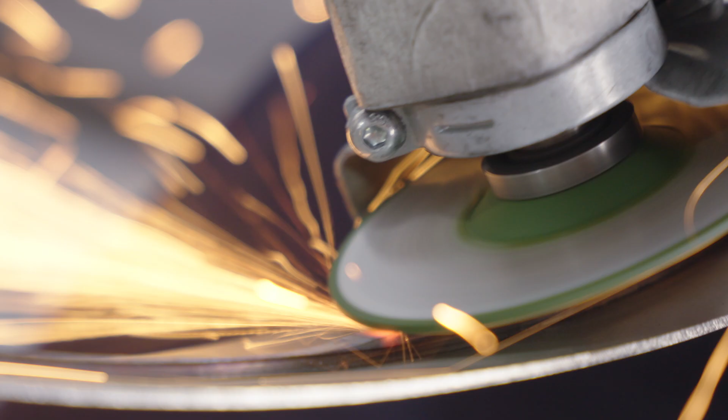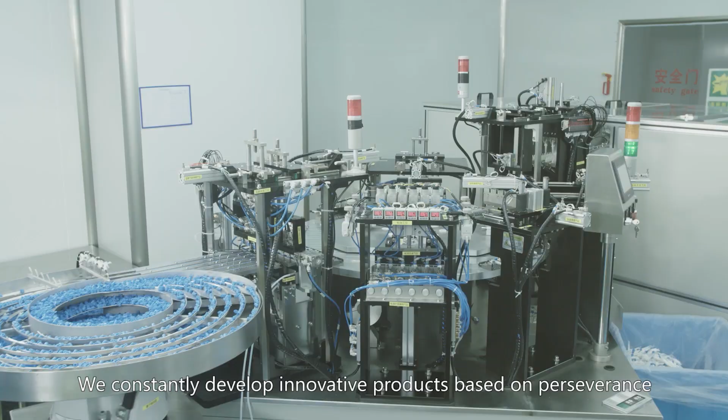What is Pu in Chinese? To abide by the original aspiration. What is Zhao in Chinese? Perseverance. We constantly develop innovative products based on perseverance. We will keep pace with the changes of the times and the industry. Be stable and far-reaching.

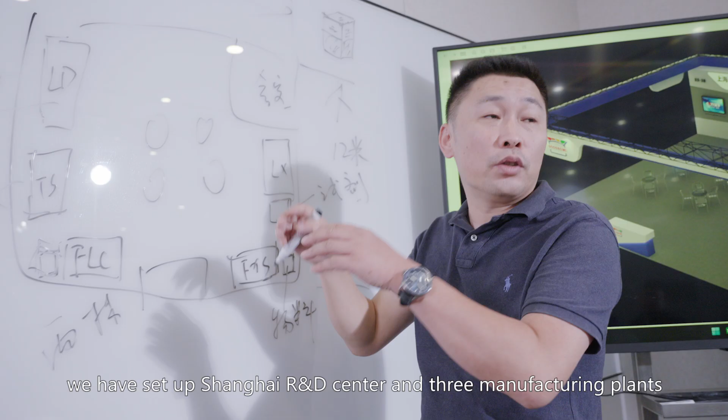PUZHUO Automation Equipment Company Limited is located in the Yangtze River Delta region and is dedicated to solving various feeding problems in the field of automation by integrating R&D, manufacturing, and service. After years of continuous efforts, we have set up Shanghai R&D Center and 3 manufacturing plants in Shanghai and Liaoning Province, growing a R&D and manufacturing team of more than 100 people.

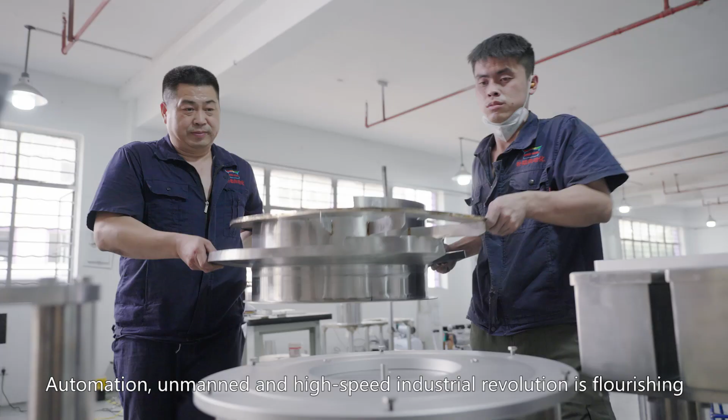Automation, unmanned, and high-speed industrial revolution is flourishing. How to realize automated manufacturing? The first step is to solve the automatic feeding of materials.

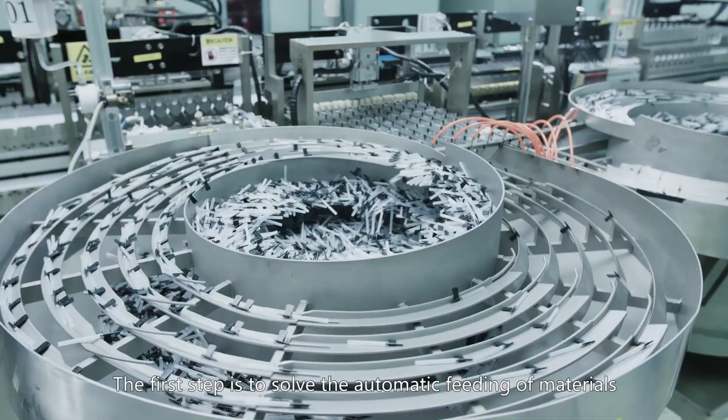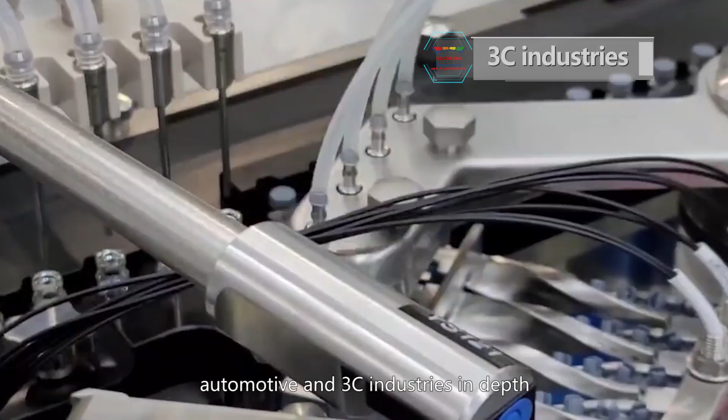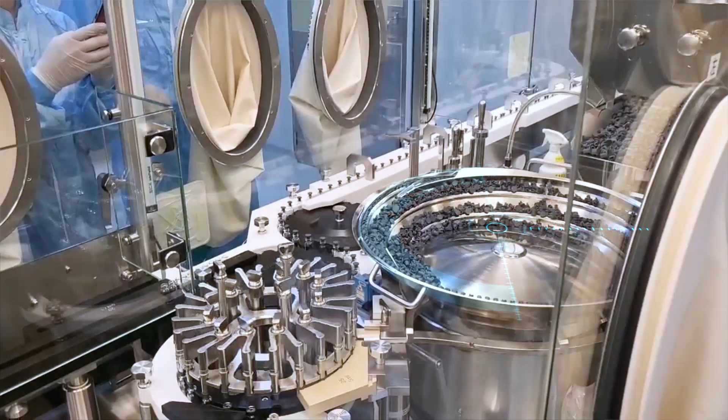PUZHUO Automation integrates industry-leading R&D and manufacturing technologies with pharmaceutical, automotive, and 3C industries in depth. Aiming at the specialized field of automatic feeding, we focus on vibratory feeding system, centrifugal feeding system, combined feeding system, and other products. PUZHUO efforts on achieving the high efficiency and high quality manufacturing automation for our customers.

Since PUZHUO was founded, tens of thousands of automatic feeding systems have been delivered to customers around the world, and more than 30 patents have been obtained. PUZHUO Automation, with innovation as the core, will never stop developing in synergy with our partners.

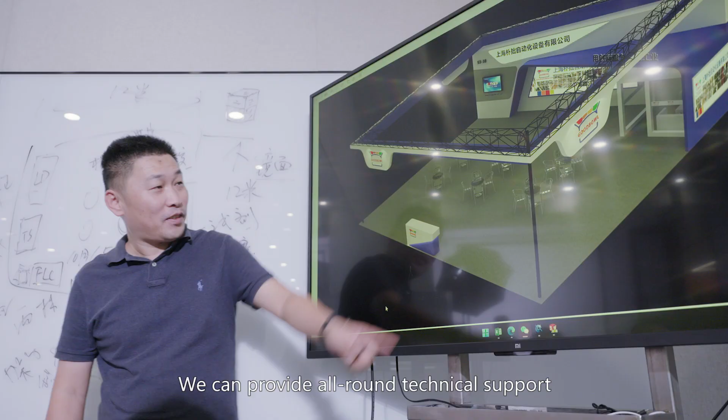We can provide all-round technical support from the advanced design stage to after-sales services. Our industry experience and material feeding solution technology can help you shorten the design cycle of the entire product line and help you achieve cost control.

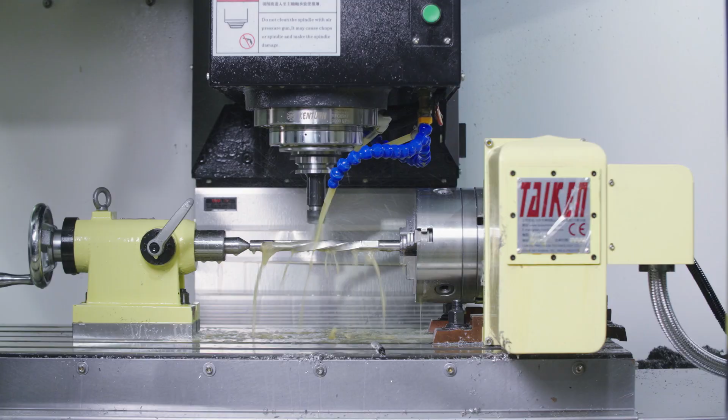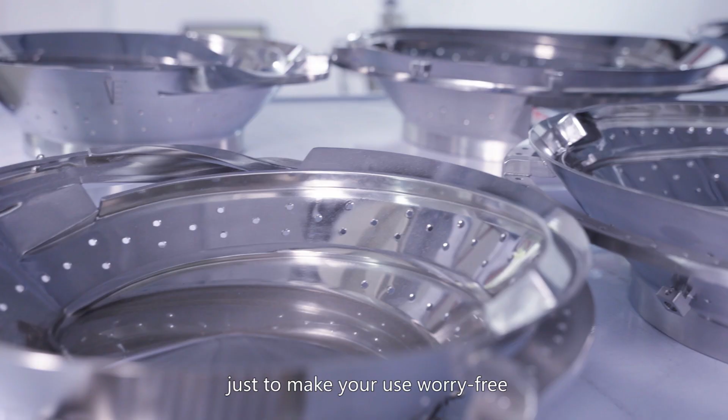Flexible manufacturing is applied in order to meet our customers' production line change-over flexibility. We have established technical documentation for each set of delivered products, a large amount of data reserves, just to make your use worry-free. Exploring the unknown in R&D, pursuing the ultimate in manufacturing, and achieving the mission in service.

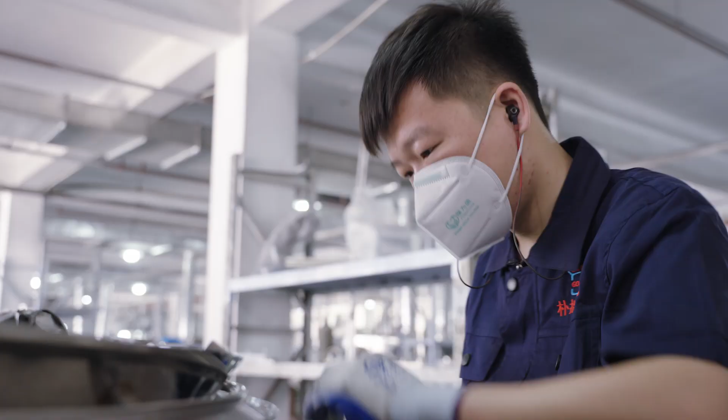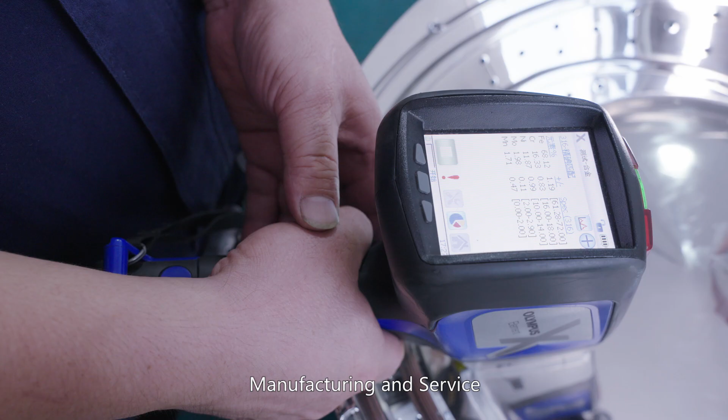PUZHUO Automation, with the technology power and innovation spirit, with high standards over the entire process of R&D, manufacturing, and service, making our products your firm choice.

In recent years, China's health industry has been booming. PUZHUO Automation is aiming at the new situation of the pharmaceutical industry with the dual drive of technology plus service, showing the innovation of Chinese design and the strength of Chinese manufacturing.

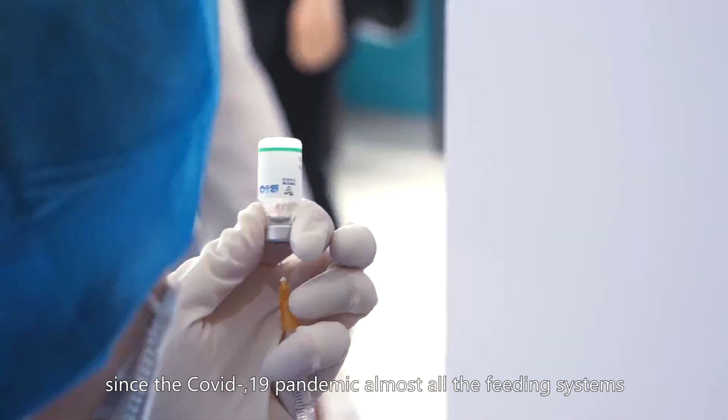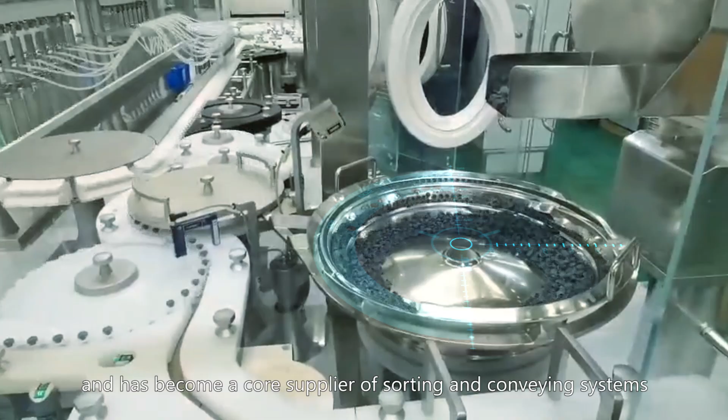Since the COVID-19 pandemic, almost all the feeding systems applied in the Chinese vaccine industry come from PUZHUO. At present, PUZHUO Automation has an annual output of more than 2,000 sets of sorting and conveying systems, with products all over the country and even around the world, and has become a core supplier of sorting and conveying systems in the field of pharmaceutical industry applications.

Hold modesty and keep honest. Walk steadily to far. PUZHUO Automation will continue to unleash innovation momentum, take advantage of the trend on the road of high-end manufacturing, and constantly rewrite the leading height of the industry. Based in China, we are working for the world.